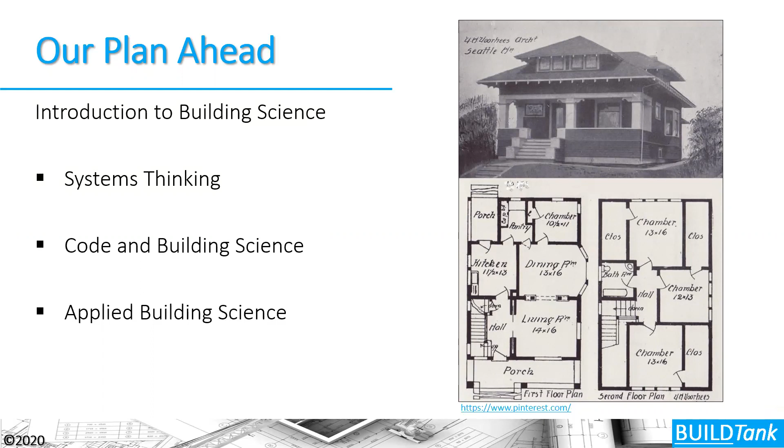To begin with, we want to have an idea of what our industry is about. This is a great quote from an organization called EEBA, the Energy and Environmental Building Alliance. They say residential construction is a complex operation, including thousands of processes by dozens of industries, bringing together hundreds of components and subsystems into a house. What we see from this quote is how complex our industry really is.

That complexity is tainted a little bit by the notion that we've been building or stick framing houses for quite some time. What has really changed is the number of people involved in the process. Back in the 1870s here in Nebraska, potentially a small family business or a group of farmers and people coming together in a community were taking a house literally from foundation through finished carpentry. Today, through research the National Home Builders Association has done, we see that upwards of 300 people are touching a house today.

And the big thing about those 300 people is that they've become specialized. Each person is doing a specific thing in the house, and very few of the people involved in the construction process really understand the totality of taking it from foundation through finished carpentry. We have an insulator, a framer, a plumber, an HVAC contractor, an electrician—all these different subsets coming in and doing their one particular component.

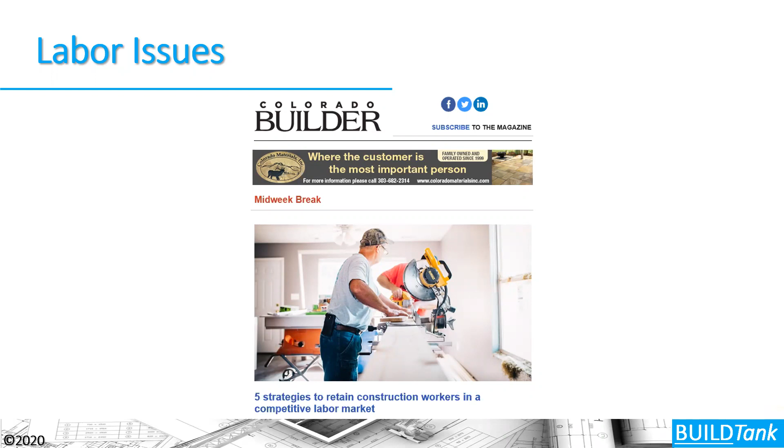We also have this relatively new issue facing our industry, and that's with regards to labor. That's one of the reasons why we're starting to specialize more. But we saw during the last recession that a number of folks left our industry, and a number of others are at retirement age. So we need to figure out how to bring people into our industry—people that are conscious and understanding this more holistic approach to building our houses, so that we move to houses that actually perform and work.

If we look at comfort, we can see that comfort expectations are fundamentally different from 1900 to our modern day. We've got a house in the 1900s where our grandparents might have lived, and they were probably willing to supplement what the house couldn't do—in essence, willing to put on a sweater in the wintertime, potentially shovel some coal or put some wood on a fire to get comfortable. In today's world, we're not willing to do that. We basically want to walk around in our underwear from room to room and floor to floor and be quote unquote comfortable. That fundamental change in expectations has changed the way we construct our houses.

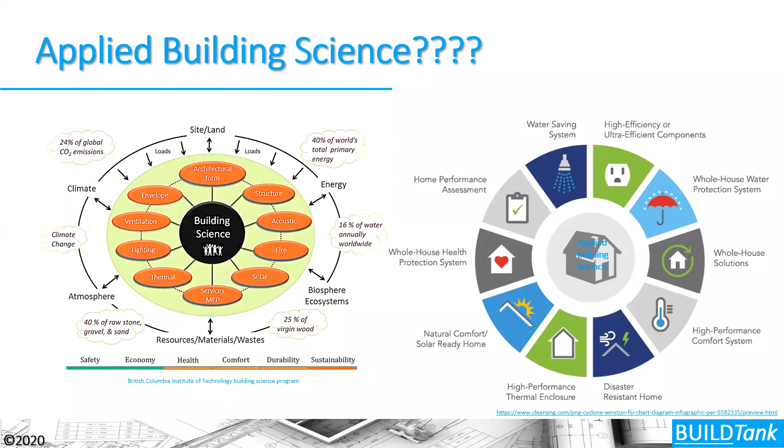Applied building science is really looking at a lot of different components and how we put these components into our houses, from water saving to energy efficiency to comfort, all these different things going together in our thermal envelopes, in our designs, in our expectations of our houses. If we break it down into its core, we're really talking about how do we understand airflow, heat flow, and moisture flow in our houses. These are the things we're trying to gain control and predictability of in a more holistic and scientific way, so that we can fundamentally meet the core expectations that people have of their homes.

So to begin with, this approach is revolving around a relatively new concept. In the last 20 or 30 years, this idea of systems thinking, or this holistic approach rather than a component approach of looking at how we're putting our houses together. Systems thinking revolves around this word synergy, which means that two or more things are coming together to achieve something greater than what could be achieved alone or by themselves.

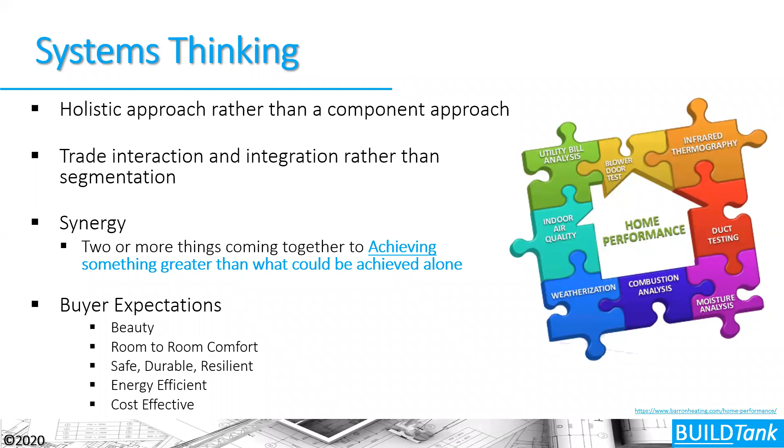What I like to say is that these core expectations we have of our housing really can't be achieved if we aren't taking a synergistic approach in how we build our houses. And that synergistic approach can be exemplified in a relatively simple example here. We have two components in our houses - we might put insulation and an air barrier system together, and we think we get one outcome of that: we're controlling heat flow in our houses.

But the reality is that these two things are coming together, and we're not only getting better control of heat flow, but we're also getting better control of airflow in our houses. We're getting better control of moisture flow, and we're also getting better indoor air quality inside of our houses. So these two things coming together are achieving way more than we might think about.

You think about putting a piece of duct and a fan together - those two things come together, well we're getting airflow, but we're getting moisture control, we're getting better indoor air quality again. So a lot of things that we put together synergistically work together to create the expectations that we have in our houses. And one of those expectations is long-term durability.

We want that house to last a long time. So really, when we're talking about control and predictability of heat flow, moisture flow, and airflow, we're really talking about durability and how long houses will last over time to meet those other core expectations that people have.

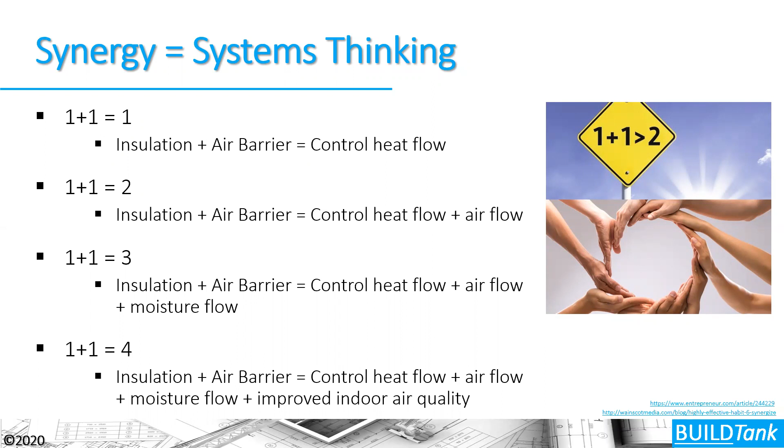From a building systems integration perspective, we need to figure out how we take the structure of our homes, the systems in our homes, and the enclosure of our homes, and how do we do that in a systematic building science applied manner? And how do we do that in a particular climate that we're living in, with whatever occupants are inside that house? All these things are coming together to create problems for us.

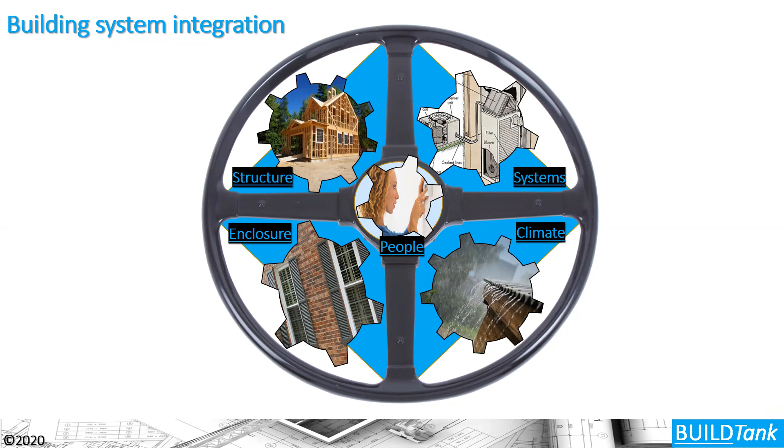The systems, structure, enclosure and climate - those are things we can wrap our hands around. But the people become the big wild card. They are the things that are going to turn our houses upside down. Those are the things we don't have control over.

We might be building a house for a retired couple, and the contract falls through, and a family of 5 comes and wants to buy that house. As a builder, I'm not going to say, I'm sorry, this house is designed for a retired couple, therefore you can't buy it. Obviously I'm going to try and sell that house, but that family of 5 is going to live in that house fundamentally differently than that retired couple.

And I need to be able to build a house that is going to be able to meet the expectations of whoever's living in that house, and understand what they care about, understand what their expectations are, understand potentially the strange things they're going to do to that house over time, so that we can take that into account and continue to build a house that will last over time, that will be comfortable, that will be energy efficient, that will meet the intent of the code and work for everybody.

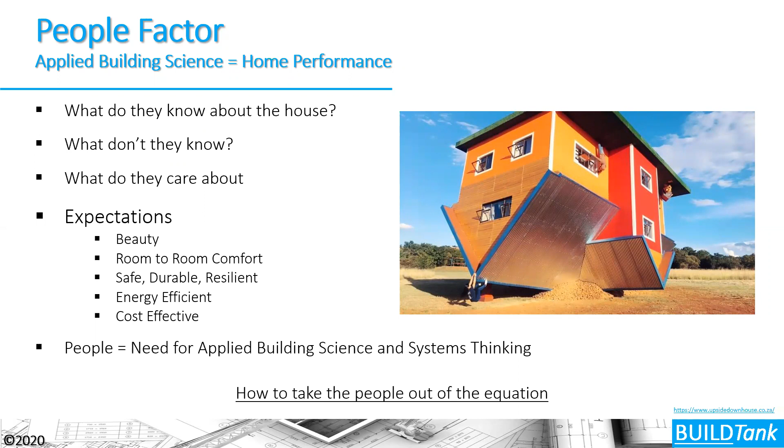So in essence, we're trying to figure out how do we take people out of the equation and build a house that lasts in whatever climate we're building that house in.

So we have kind of similar things that we're trying to do with our houses from a code perspective in climate zone 5, but we're going to tweak them slightly in our dry climates versus our moist climates, so that we have houses that will achieve that long-term durability we're trying to achieve.

So the macro climate is super important to understand. In Colorado, we've got probably the most climate zones of almost any other state. So if you're building here on the Front Range, you need to understand where you're going to place that house. If you're going up into the mountains, are you moving into climate zone 6, 7, or potentially 8? Or if you're going somewhere else, you might hit climate zone 4 as well. You're going to be asked to do something slightly different there, but it's all revolving around this notion of systems thinking and applied building science from that macro level.

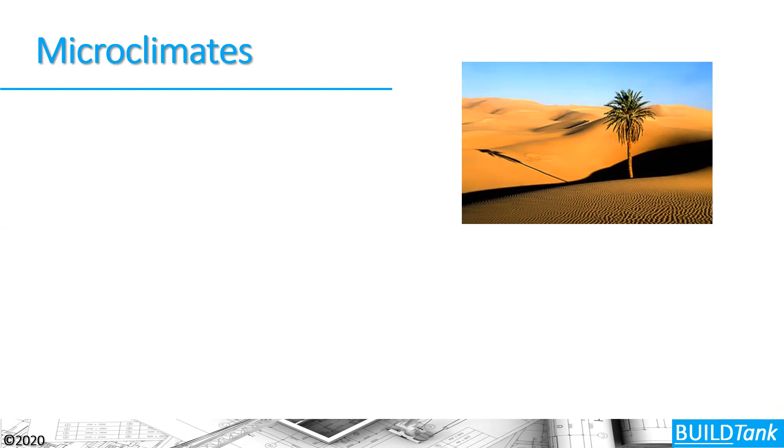But we also have micro climates that are inside our houses. Microclimates can be exemplified by this oasis that's in the middle of the desert. So in the middle of the desert, this palm tree is growing, and what's the factor that causes that palm tree to grow? Well, it's moisture. Moisture is the thing that really drives these microclimates inside of our houses.

So to get that control and predictability in our houses, we've tightened them up. We've added insulation systems and mechanical systems and ventilation systems, and we need to figure out the integration of these things, the synergy that comes from putting these things together to achieve our goal.

And our goal might just be, I don't want mold in my house. I want my house to last over time. If we have just that simple goal, well, tightening our houses, insulating our houses, mechanical systems, ventilation systems, and the integration of these things are what we need.

But we might have other goals. We might have to meet the 2018 IECC. We might have to meet an Energy Star program or a building program through the Department of Energy Zero Energy Ready Homes program. These other goals are goals that builders are trying to achieve all the time.

The big thing about these goals, however, is that we need to share these goals with all our trade partners. We need to make sure that our trade partners understand what the goal of the house is, what code they're being built to at a minimum, so that they can successfully build a house to meet the expectations that we have.

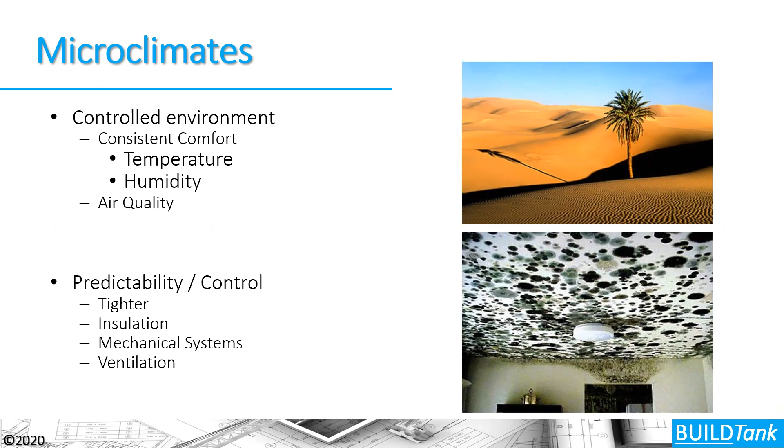Now, the IECC begins to think about building science and systems thinking when we start talking about the thermal envelope and the different control layers of the thermal envelope. But really, the IECC simplifies it more, I would say, by trying to clearly depict the thermal envelope on our drawings here.

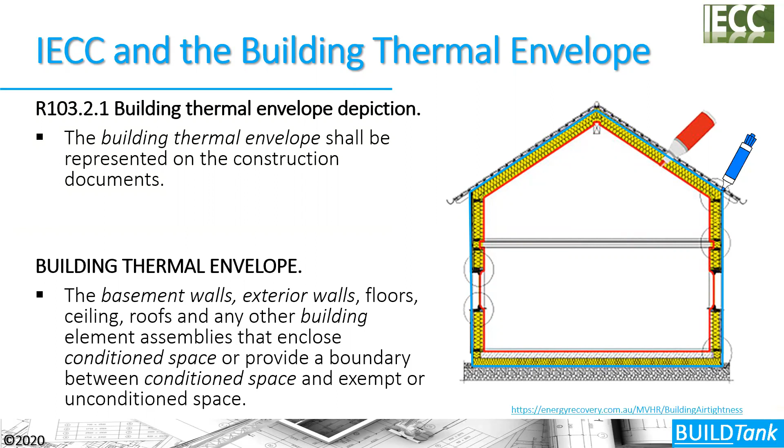Now, the building thermal envelope is defined in the code as basically an assembly of things. This assembly of things can be broken down into two primary components that create that building thermal envelope, and that would be our insulation systems and our air barrier systems, and the continuity of those air barrier and thermal barrier systems around our house to separate conditioned space from unconditioned space. That's what needs to be depicted on the building thermal envelope, because a lot of times it's not easy to decipher this out in the field.

We have this building thermal envelope in our houses, defining the separation between conditioned and unconditioned space. Sometimes it's awfully difficult to determine where that envelope is going to be, so the code helps us determine how to add supplemental air barrier systems into our homes so that we have continuity between the air barrier systems and the thermal barrier systems.

Sometimes it's pretty difficult to achieve that, and therefore we need help from people, either third parties or code inspection agencies that will come out. As a builder, you're going to say this is where I want my building envelope to be. An inspector can help you achieve that and figure out how to make that continuity happen.

So the code moves forward and talks about this continuity, that we need a continuous air barrier and thermal barrier all the way around our house. Again, it talks about these things as an assembly of different products that come together to achieve that air barrier system around our house.

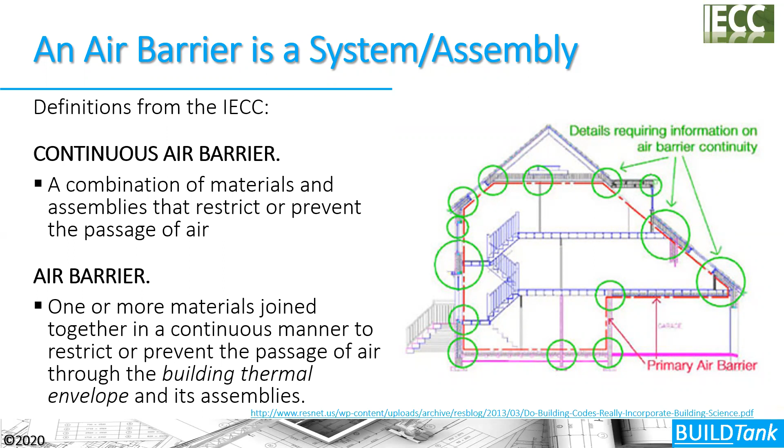In its simplest form, the air barrier system of our house can be thought about as the interior drywall and the continuity of the interior drywall. So you'll often see sections of the code where, if we don't have drywall in contact with the thermal insulation, the code will ask us to add a supplemental air barrier to the system.

For example, behind a tub on an exterior wall, that tub isn't necessarily the air barrier. We might have to add a piece of thermoply or OSB or something to get that air barrier connection between the interior of the house and the thermal barrier, the insulation of that house.

In the same way, on the exterior side, the exterior sheathing is our primary air barrier. So often in construction we think of one clear air barrier system in our houses, when the reality is that the whole assembly can, and often does, help create the continuity of that air barrier all the way around our house. That brings up the question of what's the house wrap?

I've always thought the house wrap was the air barrier of the system. Well, really the exterior sheathing is our primary air barrier. The house wrap might be a supplemental air barrier, but the house wrap's true reason for existence is to be this drainage plane.

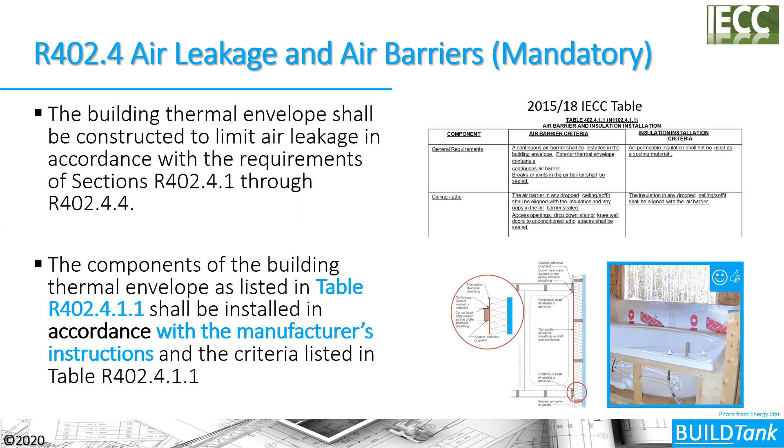What it ultimately gets us to, from an air barrier perspective, are these five key attributes: we need continuity, strength, durability, stiffness, and impermeability of the air barrier systems we're installing in our houses. So we have to understand that fibrous insulation is not an air barrier system—it's air permeable, it allows air to move through it.

So we need to pick things like thermoply, OSB, drywall, foam sheathing, these rigid air barrier systems to create the continuity around our houses, because those are the things that last over time and have the strength and continuity that can actually function in our houses.

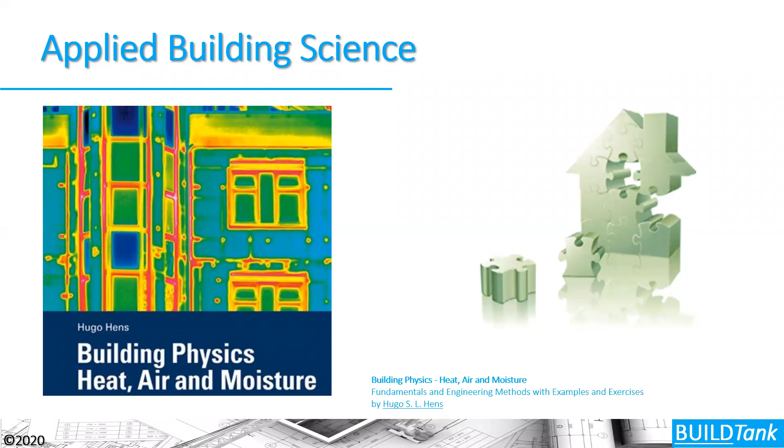So applied building science, again, in the code, let's break down thermal flow, moisture flow, and air flow. We're going to start with thermal flow in our houses and talk about the different components here.

Heat flow: heat always moves from higher concentrations to lower concentrations, or in essence from warm to cold, and never in the other direction unless you add additional energy to the equation. This is based on the laws of thermodynamics, which say energy can't be created or destroyed. Energy moves or changes forms, and there might be some waste there, but heat is this transfer mechanism between different components, always from higher concentrations to lower concentrations, though there might be some waste in that process.

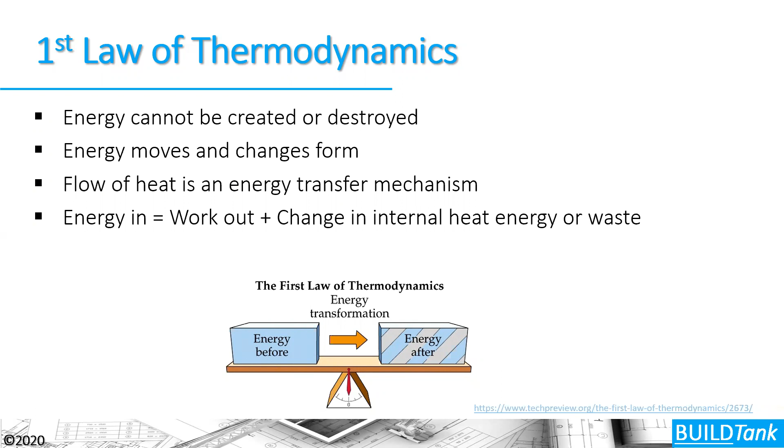We can see that if we look at a furnace, for example. If energy in equals energy out plus some waste, and I had 100,000 BTU at 90% efficient, then 90,000 BTUs would go into heating the house, and 10,000 BTUs would be waste going up the flue. That waste heat isn't beneficial to the house, but it's not destroyed heat. That energy is still out there, going into the atmosphere, into the weather patterns, for example. It's this notion that energy isn't created or destroyed, it just changes forms, and one of those forms might be a little wasteful.

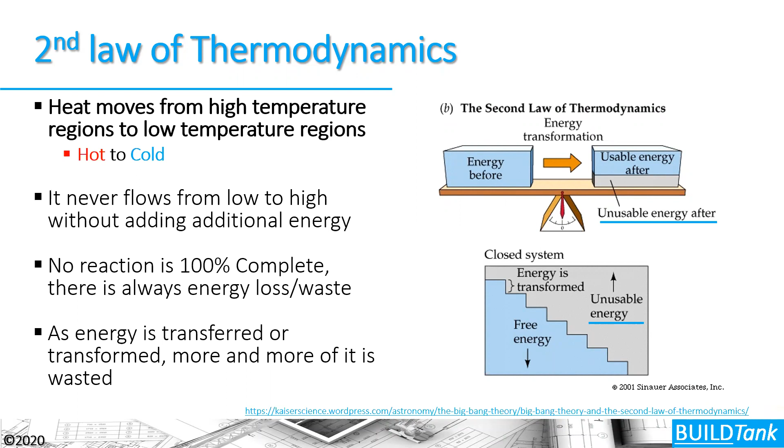So ultimately, from an energy efficiency perspective, we're trying to limit that waste as much as we can. The second law says that heat moves from high temperature regions to low temperature regions, in essence from hot to cold, or from higher concentrations to lower concentrations. It never flows in the other direction unless you add additional energy. And as we said, there is some waste, so there's no such thing right now as a 100% complete reaction. There is some energy loss, and energy is going through this transfer process from one object to another, or from one state to another.

So temperature is one of these things we need to understand. This is the heat, heat in the form of energy, heat as measured and how energy is transferred from one system or body to another. So if, for example, the heat in the body of this dog is moving from the body of the dog into the ice cube to actually cool that dog down, it's not in the other direction.

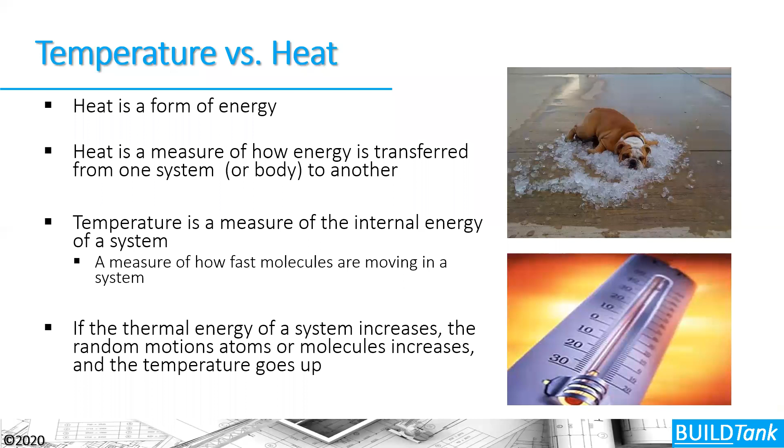Temperature is also a measurement of the internal energy of the system. This is the measurement of how fast molecules are moving inside that system. This gives us the ability to measure the heat in a thermometer. As those molecules move, the thermometer goes up. So there's this measurement quality in heat as well.

Heat is transferred in this exchange between physical objects. But things don't have to necessarily be hot to have energy, and this is how we understand a heat pump working. If we're trying to heat a house in the middle of winter using a heat pump, it's baffling to our mind that we can get energy out of super cold air, air that's below freezing, which is really amazing. It's all because of the physics that let us know there's still energy in cold air that can be moved into the house to actually heat that house. That's part of the energy transfer mechanism we were talking about.

This makes us need to understand the notion of delta T, or the temperature difference between different locations. So if I have a 68-degree interior temperature inside the house and 10 degrees outside, I have a delta T, or temperature difference across my building thermal envelope, of 58 degrees. That's going to help me understand the direction of heat flow from inside my house to outside my house.

Generally this is happening in Colorado in the wintertime, and in the summertime it switches so that we have more heat outside than inside, and the energy is trying to move from outside to inside our houses. Therefore, we're trying to create mechanical systems that can supplement the heat loss or heat gain that we might be having in our assemblies.

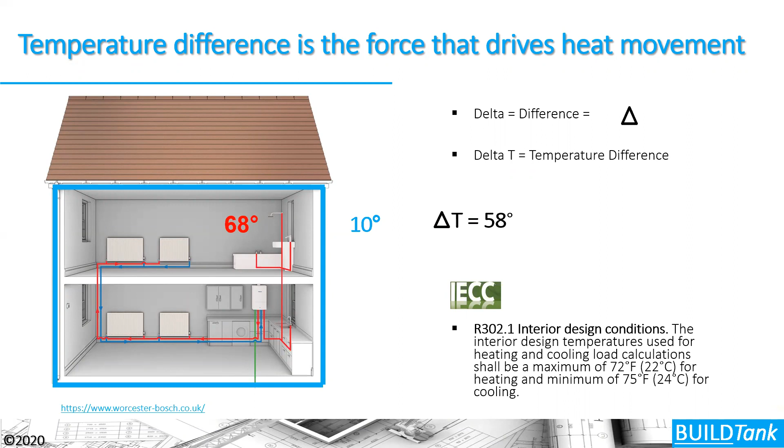So just to summarize again a little bit, the flow of energy is from hot to cold, or from higher concentrations to lower concentrations. And the higher the delta T, the greater the heat and air, or the more the heat and air want to escape or enter into our buildings. So delta T, again, is a good concept to have an understanding of from this heat flow perspective.

The last two things we're going to talk about are two types of heat and some energy principles here, because you need to have a concept of sensible heat. Sensible heat is heat that's able to be sensed by that thermometer, heat that's able to be absorbed or released by a substance. This is the energy that's ultimately described by heat load calculation, the energy that's going in and out of our buildings.

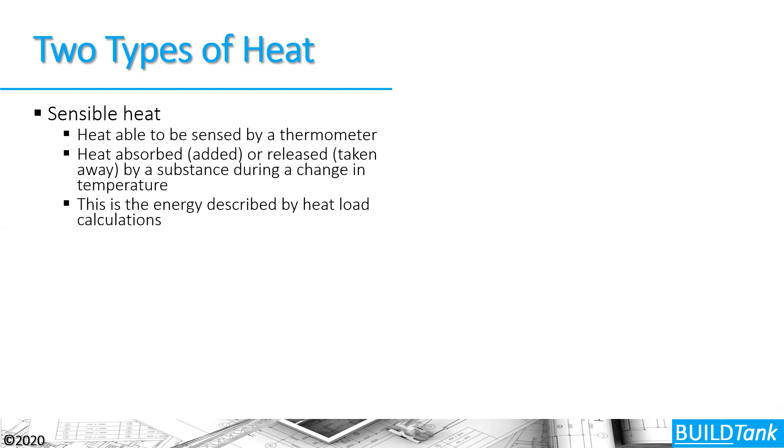The next one is latent energy, and this is the energy that's released or absorbed by a substance during its change in phase. So if we're going from a solid ice cube to liquid water, or to vapor water in its vapor state, energy is being released at each of those times, or being absorbed depending on the direction it's going. So latent heat is kind of a swing factor in our design process, especially when we're talking about HVAC systems and designing HVAC systems.

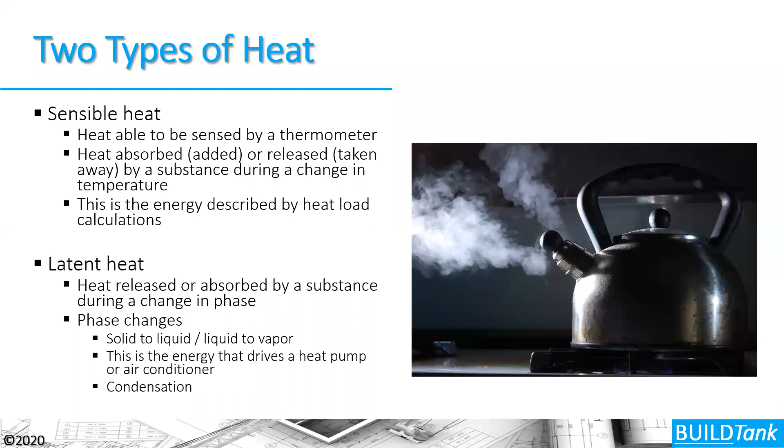And in Colorado, we don't have a large latent heat load in our houses, so we're primarily concentrating on the sensible heat. But you're probably going to come across a notion of latent heat when you're talking to an HVAC contractor, and it's good to have a background and understanding of what they're talking about there.

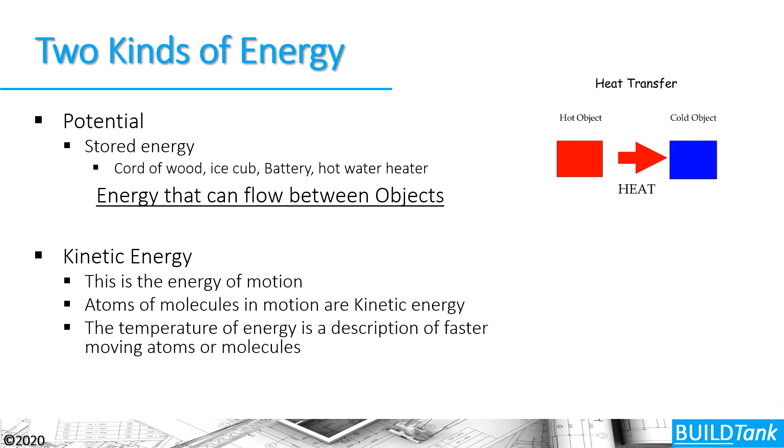And then the last thing, the two kinds of energy: we have potential energy, which is stored energy in a cord of wood or an ice cube, energy that can flow between objects, from higher concentrations to lower concentrations. And then kinetic energy, this is the energy of motion of atoms or molecules, and that's what we're talking about when we're talking about temperature and thermometers out there. Energy that's measured in that thermometer would be kinetic energy.

Okay, so that's heat flow, and heat flows through our objects or our homes in three specific ways: by conduction, convection, and radiant energy movement. Let's break these down in a little bit more particular fashion so that we understand them individually, because the reality is that they're working simultaneously in our houses. If we can understand them individually, we might be able to see if one is a bigger driver than the other. This is particularly helpful when we're talking about existing homes, if we're trying to diagnose a comfort issue in an existing home, or if we have a warranty issue in a new home potentially as well.

And we have certain members of our buildings that transfer heat faster than other members. In essence, our studs, our framing, are the weak point in our houses because the R value, or the resistance to heat flow, is only about 1 per inch for wood, versus a stud cavity that's blown with fiberglass insulation, for example, which might have an R23. So you're going to have more flow of energy through your framing than through your cavities.

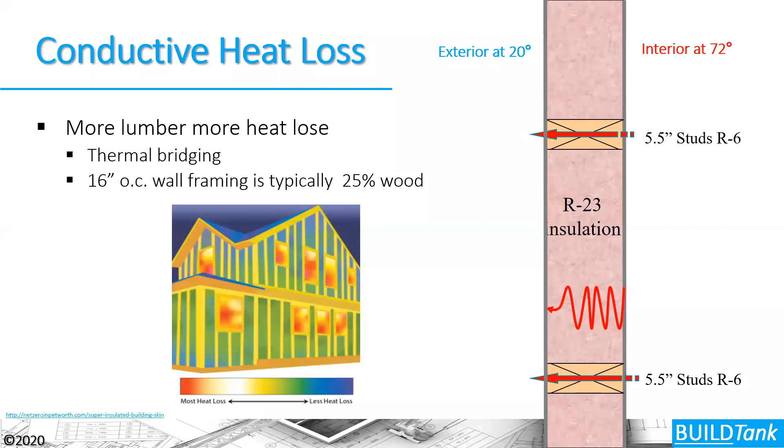Our typical 16-inch on-center wall framing is about 25% wood, so it might lead us to consider reducing the wood and going to 24-inch on-center framing, for example, in order to reduce the conductive heat flow and make our house a little bit more efficient. There are other components that are super important to think about from this thermal bridging perspective, where energy can move through our assemblies quickly.

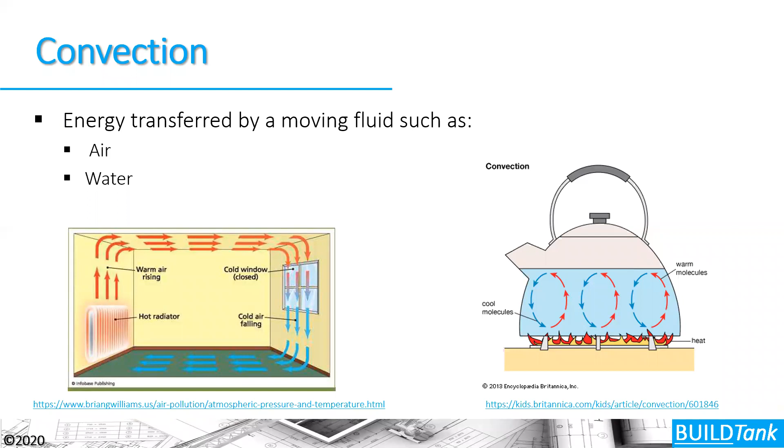Now, the next way that energy moves in our houses is by convection. This is energy that's moving with a fluid like air or water inside our houses. We can get convective air loops happening inside poorly insulated wall cavities or floor cavities potentially, generally wall cavities more because they're taller.

As air warms, it moves, warming on the interior side of our assembly. It rises, hits the top plate, and moves itself over to the exterior where it cools. That's where we start getting this loop effect, where energy is taken from inside our houses and moved to the outside, in essence bypassing the insulation. So the R value of the insulation, because it's not fully filling the cavity from side to side, top to bottom, and front to back, we're allowing convection to happen inside that cavity instead of trapping pockets of air there. So convection happens inside our wall cavities potentially, but also inside our rooms.

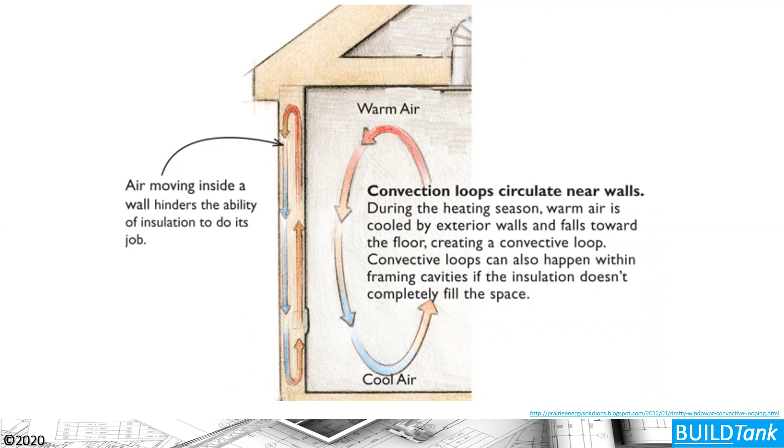So air can be cooling against the window, for example, and fall to the floor. Then as it moves into the interior side of our rooms, it starts warming and rising up to the ceiling and back, creating this loop again inside our houses. So properly insulated and sealed assemblies help us avoid this convective loop that might be happening inside our houses.

Which brings us to an idea of how do we insulate these assemblies properly. Here's an example of a test thermal box being demonstrated here. Now we have 4 cavities in this thermal box, and the idea is to pick which one we think is performing best and what is the R value of the one performing best.

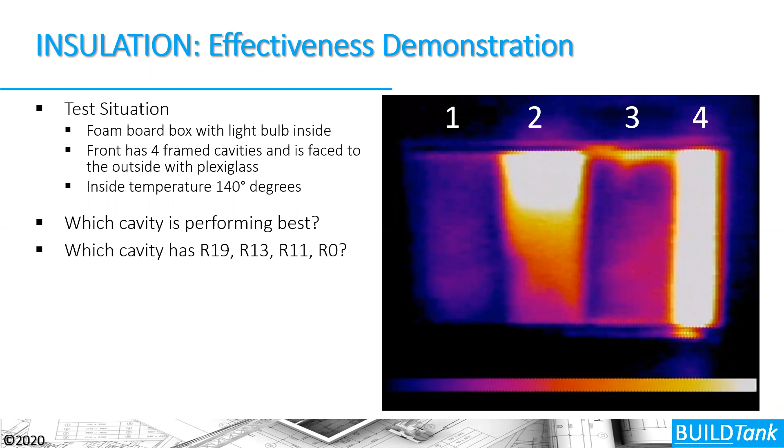So we have different cavities here, R19 to 0. I want you to think right now, which cavity do you think has the R19 batt and which cavity do you think is not insulated? I think you might be surprised, because the R11 batt is in cavity 1, and it has a proper air barrier system. The cavity's been insulated properly, and you can see it's performing the best here. There's less heat flow moving through that cavity.

Cavity 2 has the R19 batt in it, but there's a pretty substantial gap at the top plate, and it's not working. The 3rd cavity is an R13, installed pretty well but not perfectly. And the 4th cavity has no insulation in it at all.

So what we learned from this is that the R value is definitely important, but really how that R value is installed is even more important. So to get that reduction in convection and conduction happening through that assembly, we need to look not only at whether the insulation is in the cavity, but how it's been installed to actually perform and work properly.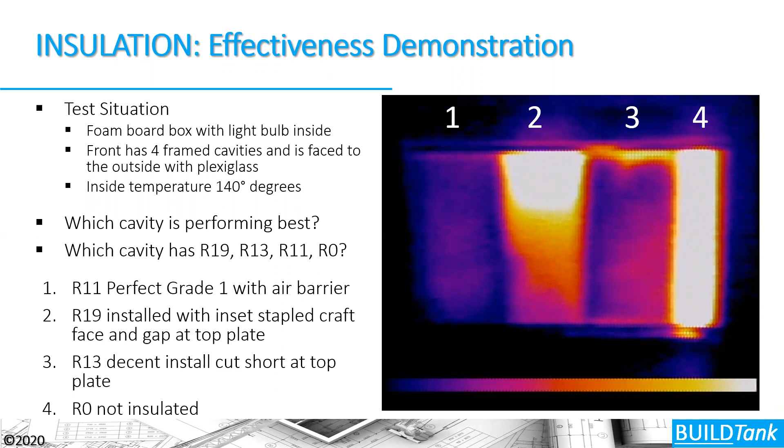And that's really what the code is helping us understand. Over time, especially with help from the city of Fort Collins, we've learned that this notion of 'is it there and does it work' needs to be the focal point of how we inspect homes to demonstrate compliance with the energy codes as they're being instituted now in our jurisdictions.

Radiant energy is the last way that energy moves in our houses. This is energy that's flying through open spaces from objects of higher temperature to lower temperatures. The best example is the energy from the sun moving literally through space to the earth, or a campfire. You've got the energy from that campfire moving linearly to you, meaning it moves in a straight line from that campfire.

It hits you and warms you up on your front side, but your backside is cold because the energy isn't able to wrap around your body. It moves in a straight line. The big thing to know about radiant energy is that you have to have an air gap.

That air gap can be on one side of the assembly or the other side of the assembly, but you have to have an air gap in order for that radiant air barrier or radiant energy barrier to actually work. We don't use a lot of radiant barriers here in Colorado since it's generally a heating dominated climate, but radiant barriers work based on this notion of emissivity - a measurement of how much radiant energy a material is able to emit into the assembly and retard the movement of energy into our buildings.

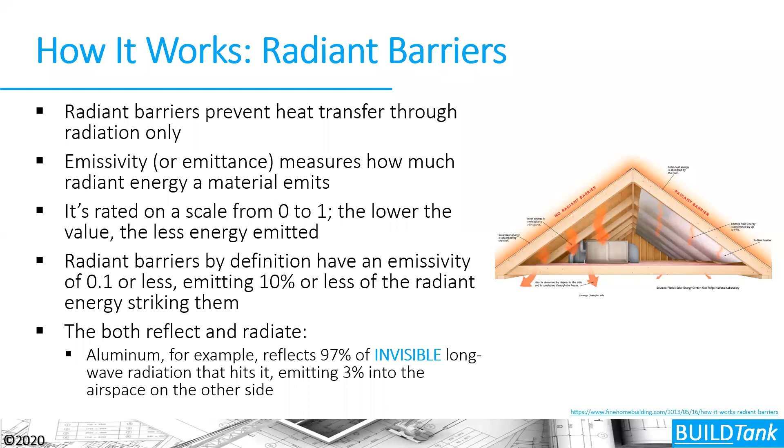If you move to a more cooling dominant or a cooling dominated climate, you'll need to know a little bit more about radiant barriers, and there's lots of information out there.

From a human comfort perspective, we're talking about mean radiant temperature here - this ability of our surroundings to impact our comfort because our body heat can actually radiate from our body to colder surfaces around us or from warm surfaces around us to our body. So it's either moving away from our body or to our body, to keep us comfortable or to make us uncomfortable.

I don't know if you've heard, but sometimes if you're in a kitchen with a lot of granite countertop and that granite is cold, you can actually be cold while you're cooking your meal because your body heat is radiating to that colder surface of the granite or to the colder surface of a window, for example. A lot of times when we have cold windows, people think that the window is leaky. The reality is that window is a cold surface and our body temperature is moving to that window, making us cold and also making air drop down and flow across that window from the height of the window down to the bottom, creating a current there. It doesn't necessarily mean that current is connected to the outside - it's just this radiant energy that's happening there, or potentially the convection that's happening there.

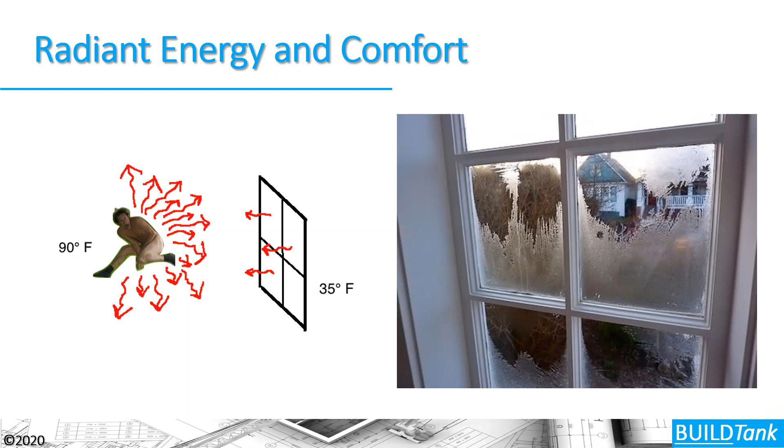So the six variables of human comfort are things that we might or might not be able to control, from air temperature, relative humidity, air movement, and mean radiant temperature, to things that we definitely can control, which are the clothes that we wear. We might not be able to control our metabolic rate, but we do have some ability to raise surface temperatures, to impact the relative humidity inside our houses, to limit the air movement, and again to raise the surface temperature around us to better control comfort inside our houses, so that people don't necessarily need to supplement their comfort by putting on a sweater in the wintertime, as we had to do in the early 1900s in those houses we showed before.

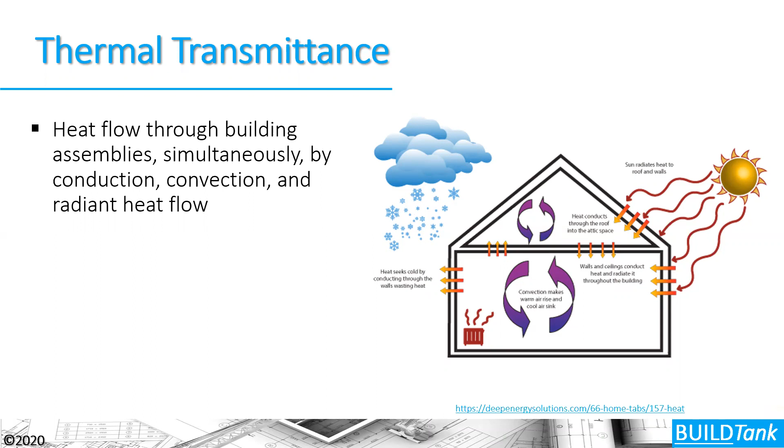Thermal transmittance is when all of these things are happening simultaneously inside of our houses. So again, it's important to remember that conduction, convection, and radiant heat flow are happening simultaneously in our houses, but we can often figure out which is the largest trigger and concentrate on that. Really the synergy of how we gain control and predictability of thermal flow in our houses comes from looking at conduction, convection, and radiant energy all at the same time.

Air sealing and insulation in the IECC relies primarily on manufacturer instructions. There are some specific instructions in the prescriptive section that are actually mandatory for how you install insulation in floor assemblies, cavity or other wall assemblies, ceilings, or attics. And then we have the insulation and air barrier table as well. But again, the code relies largely on manufacturer instructions.

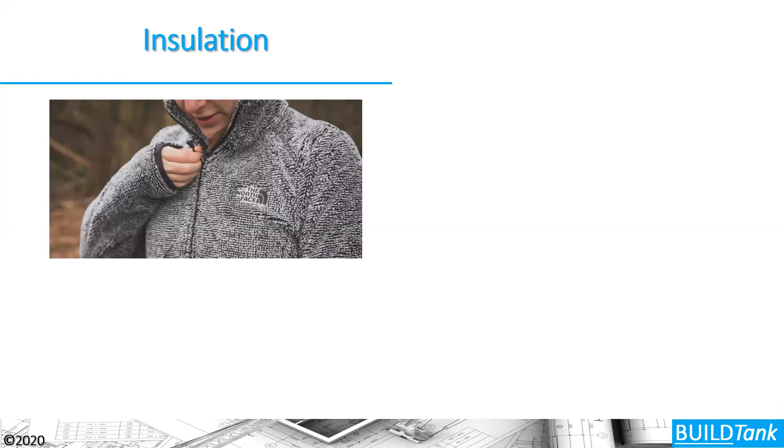So we need to understand how insulation works, and the reality is that insulation works exactly the same way that insulation works for our body. This guy is wearing a fleece jacket, and the object of this fleece jacket is that it will trap a pocket of air. It's really that stagnant pocket of air that creates the R value, or the resistance to flow of energy from higher concentrations to lower concentrations. So this energy is moving from this person's body to the ambient air outside of their thermal layer of insulation, which is this fleece jacket here.

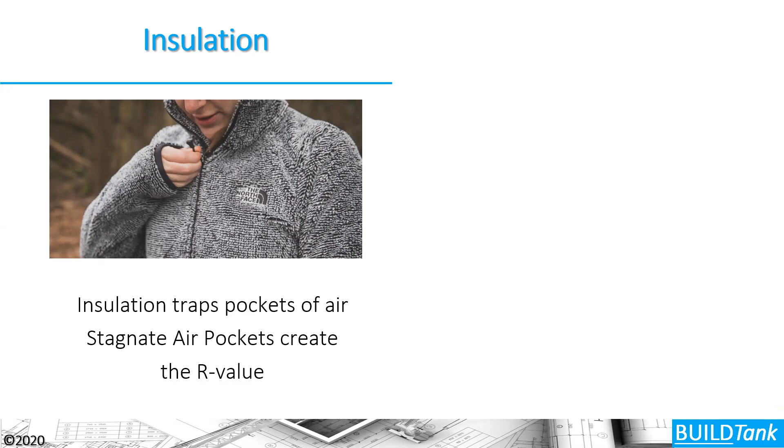The problem is that stagnant pocket of air won't remain stagnant if the wind starts blowing. If the wind starts blowing, then the air pocket is leaving the insulation, and with it, the energy is leaving too, and this person will become cold. So they need to put an air barrier over their thermal barrier.

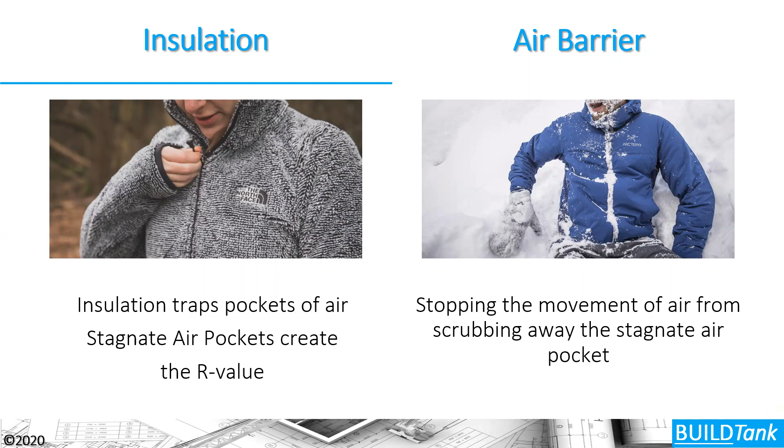So we get a nylon shell over our thermal barrier here, and we have a system that ultimately works to trap a pocket of air and create an assembly that works. They've got an exterior air barrier, which is their nylon shell. They have their thermal barrier, which in this case would be fleece. And then they have an interior air barrier system, which would be their skin. They have a system that works exactly the same way that it works for our assembly.

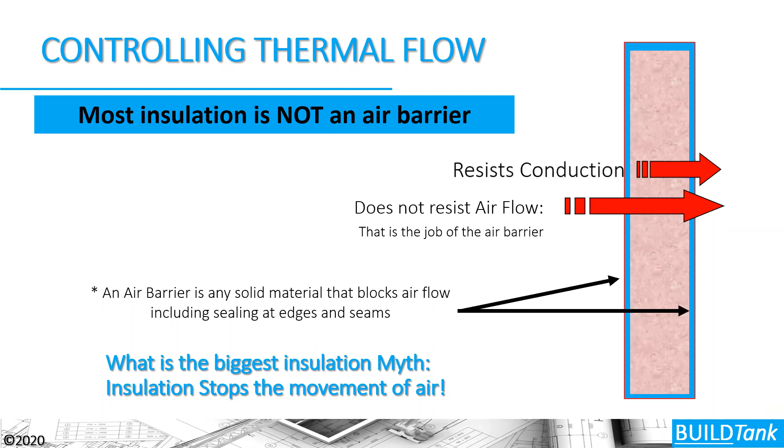We've got a thermal barrier here that resists conduction, but it doesn't necessarily resist airflow through that material. So we enclose our assembly on 6 sides with an air barrier system when we're talking about wall cavities and floor cavities in order to keep that stagnant pocket of air stagnant and get the rated R value of the material that's been installed. Because the reality is insulation doesn't stop air movement. So we need to understand that, so we can better look at the assemblies we're building and try to better ensure they're enclosed on 6 sides with complete air barrier systems, especially when using fibrous insulation in our houses.

From an airflow perspective, we're going to change course and start talking about airflow, and we need to think about airflow in our houses. I like to think about airflow as a freight train. Air is a transport mechanism, just like this freight train is a transport mechanism. This freight train's moving coal from point A to point B. Air is moving heat, energy, and pollutants around our houses.

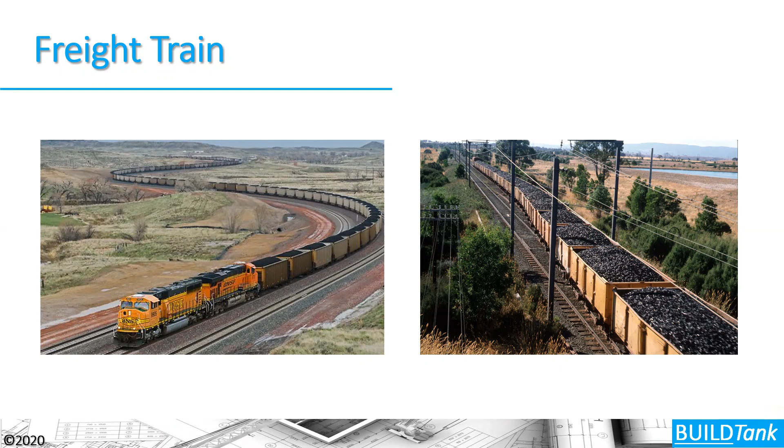And the problem is, when does the train drop its load? Where does it put its cargo? So where does the air put its cargo? If it's putting heat and moisture inside of our cavities, that's a problem. We're going to get repeated wetting and condensation most likely from that. So we need to be able to control airflow so we can control where it's depositing heat, moisture, and pollutants in our houses.

So you'll get this question quite often: can our houses be too tight? The real answer to the question is no, our houses can't be too tight, because in order to control airflow in our houses, we have to be able to build a house tight. We're actually asking the wrong question here. We need to control the airflow in our houses, and to control the airflow, we need to build our houses as tight as we possibly can.

But the real question is, are our houses underventilated? And the answer still, unfortunately, is yes, they are underventilated in most cases. We're getting better and better. It is now a code requirement that our houses not only be built tight, at a minimum to 3 air changes per hour in most jurisdictions that haven't amended the code, but we have to couple that with ventilated houses, whole house controlled mechanical ventilation as well.

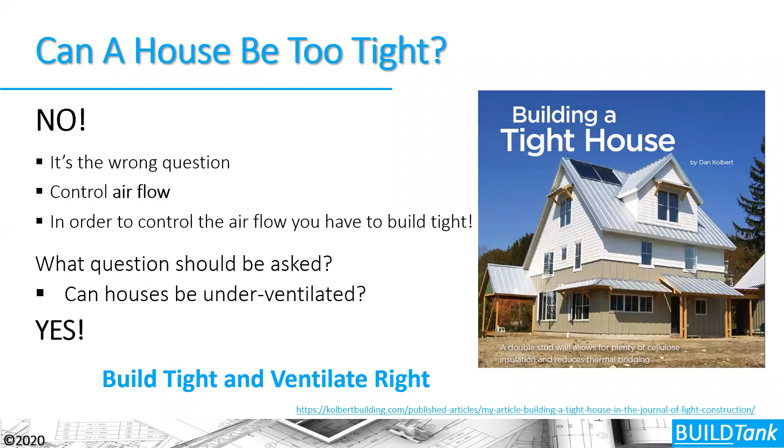So if we can have the synergy of a tight house and a well-ventilated house, then we can live up to this mantra of building tight and ventilating right. It gives us the ability to have control and predictability of airflow in our houses, and ultimately thermal flow and moisture flow as well.

So we're looking for that control and predictability in the same way that we might be going to McDonald's to get a Big Mac in Fort Collins or Windsor or Denver or Paris, France. Wherever I go and get that Big Mac, I know exactly what I'm going to get, exactly what it's going to taste like, and exactly how I'm going to feel afterwards. That's what we're ultimately looking for, is to get that level of control and predictability in our houses for airflow, moisture flow, and heat flow. Ultimately, when we get that control and predictability, we're trying to get this equilibrium inside of our house, this balance that creates a state of comfort.

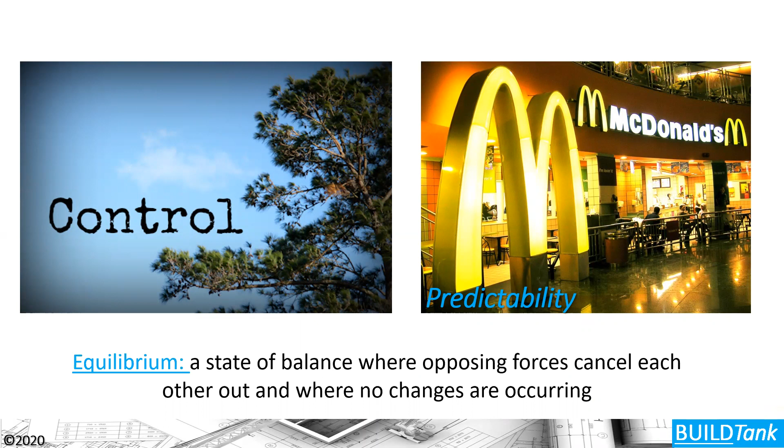So to get that control and predictability of airflow, we need to be able to figure out holes and pressures inside of our houses. We have lots of holes in our houses. We're getting better and better at sealing up these different holes and places. The code requires us to do some of this. For example, here at the rim joist, the code requires this level of air sealing. But the pressures are a little bit harder for us to do.

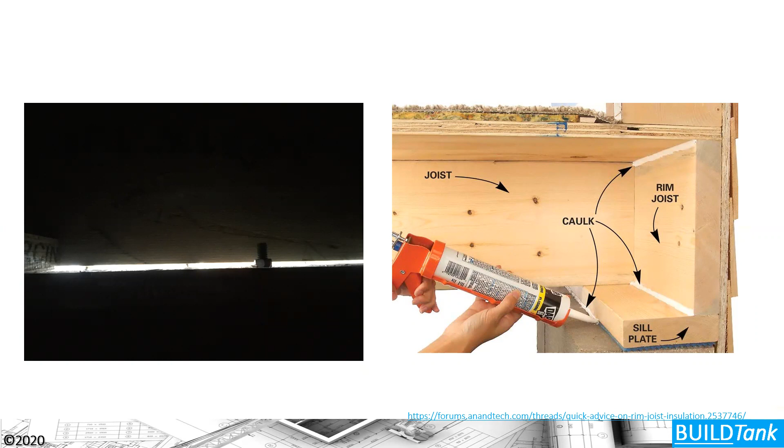So let's try to understand this in a little bit more depth. If I have a rubber balloon and the rubber membrane of that balloon is my building thermal envelope, the alignment of my thermal layer and my air barrier system inside my house, I have equal pressure on each side of that membrane. The pressure pushing out and the pressure pushing in are equal.

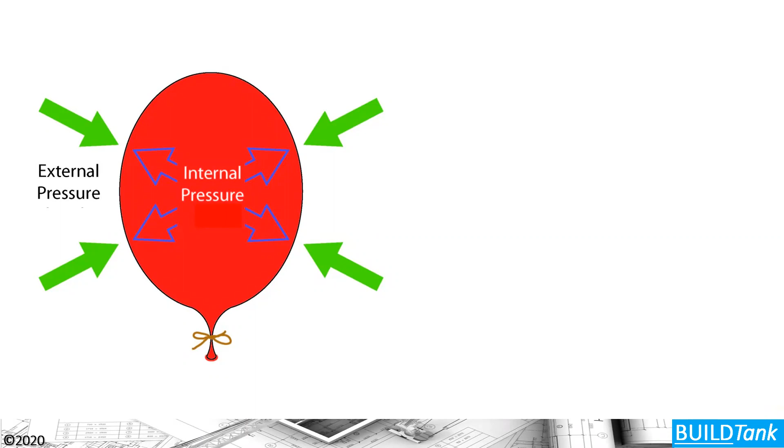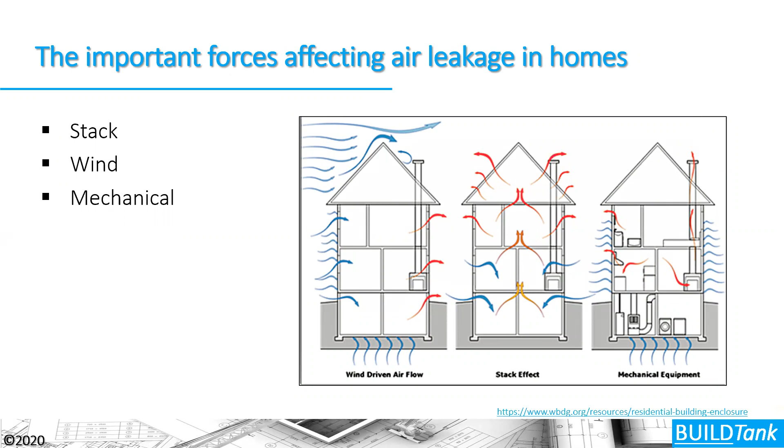But if I untie the string and create a hole, the pressures become unequal. I have greater pressure inside than outside, and I deflate that balloon. So in order for air to move inside our houses or around our houses, I need a pressure difference, and I need a hole that pressure can move through, that can push air through. It turns out we have some fairly constant pressures on our houses: stack, wind, and mechanical effect. But I need a hole as well for these pressures to interact and move air through our building assemblies.

Stack effect or stack pressure describes what happens to air as it warms. As air warms, it tends to rise and hits the higher planes of our houses. As it reaches those higher planes, it creates this positive pressure, and it's seeking a hole to the outside, maybe through a can light or plumbing stack or the connection between drywall and the top plate. Once air leaves on the high side, it has to be replaced on the low side. So with this notion of air in equals air out, the same volume of air leaving the house is replaced by the same volume of air coming in.

As our houses are taller, that stack effect can be increased. As the temperature difference between inside and outside is greater, that stack effect can accentuate as well. We're seeing these tall stacked townhouses being built, 3 or 4 story townhouses. It's pretty amazing, the stack effect you can feel when you go up to the top level, put your head over the railing of the stairway, and you can feel the air coming up through that stairway. That's the stack effect happening.

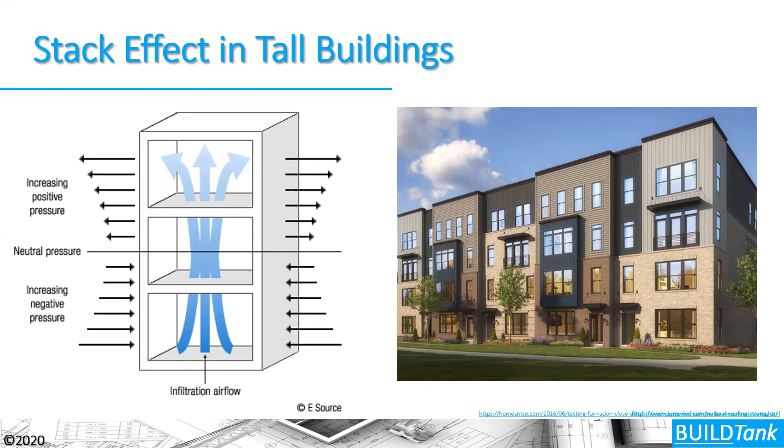The next is wind. And I know it's not that windy in northern Colorado, but just say the wind blows occasionally in northern Colorado. That was a joke, and unfortunately it doesn't work well when I can't see everybody and interact with everybody.

But anyway, air is blowing against our houses, and it creates a windward side and a leeward side of our houses. It creates pressures not only outside our houses, but inside as well. So as the wind blows, we get a positive pressure on the windward side and a negative pressure on the leeward side of our house. That creates a suction that is moving air from inside our house to outside. That can create a problem because that air potentially is moist and carrying heat. If it's carrying that moisture and heat through our assembly, we can have a problem inside our building assembly.

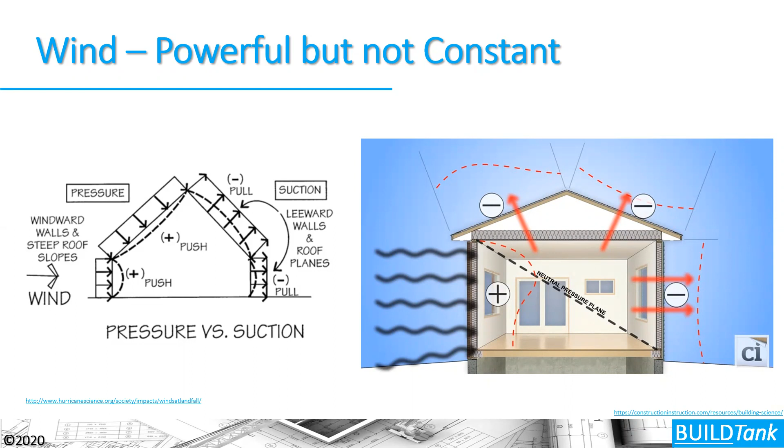Next, we have mechanical systems. Mechanical systems would be our HVAC systems or other fans that are moving air from inside our house to outside, creating unequal room pressures and house pressures. An example of that would be a duct system located in our attic that has a return side leak. The return side leak means I'm returning less air than I'm supplying to the house, and therefore, because I'm supplying more air to the interior, I'm blowing that house up like a balloon. I'm creating this positive pressure inside that house.

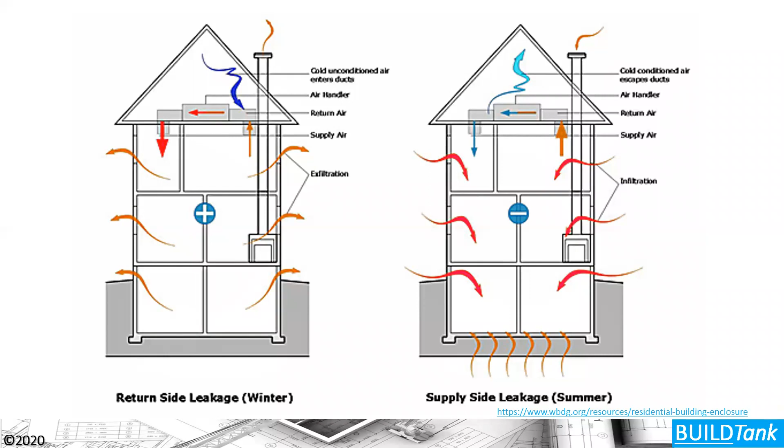The picture on the right shows the reverse, where I have a hole on the supply side of my duct system, and therefore I'm supplying less air than I'm returning, creating this negative pressure in the house, and sucking air from outside into my home. Neither of these examples are good for our home. We obviously want a balanced HVAC system so that we're not creating pressures that push air through our building envelope or suck air through it. Remember, air is a fluid, and it will move if there's a path present. So if there's a hole, that would be the path. And if there's a driving force, that would be the pressure. If those two things are present, then air will move through that building assembly.

If either are missing, air will not move. So we need this notion of air in equals air out. Now we're measuring this in CFM, cubic feet per minute, air in versus air out. To conceptualize that, a cubic foot is about the size of a basketball. So if air is moving out 1 cubic foot, that's like 1 basketball moving out of the house, which means 1 basketball is moving back in as well.

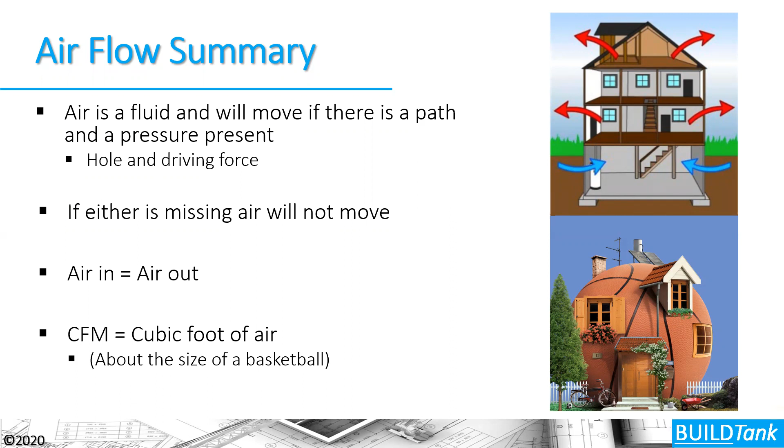So we have this 100-year-old house. The question is, how is it lasting so long? Well, the reality is that because it's drafty and uncomfortable, it's also very durable, because it ultimately has tremendous drying potential. If it gets wet, a lot of air is moving through that house and it's drying.

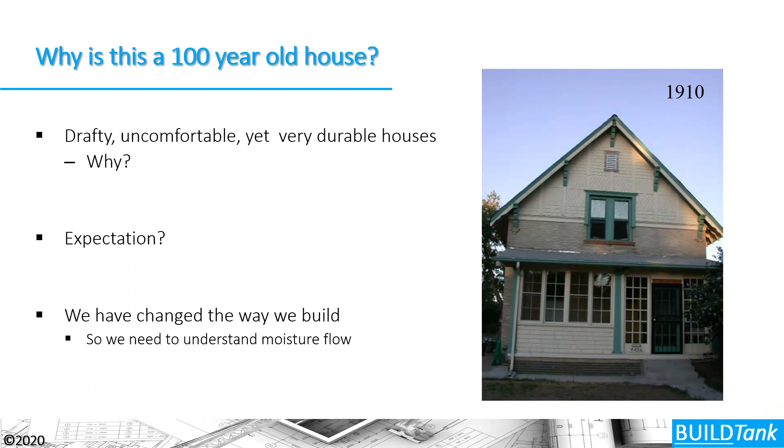But our expectations have changed the way we want to interact with our houses, and therefore I've changed the drying potential of this house. Because I've changed that drying potential, I need to understand how moisture is flowing through the house and how to promote drying mechanisms over wetting mechanisms. This is the last part of what we'll be talking about today.

So we know that things get wet, and therefore we need to let them dry. They get wet from the outside, from the inside, they get wet from the start — we often start with wet building materials. And then there's repeated wetting through condensation buildup in our houses, sprinklers against the side of our houses, and other things that repeatedly wet our homes.

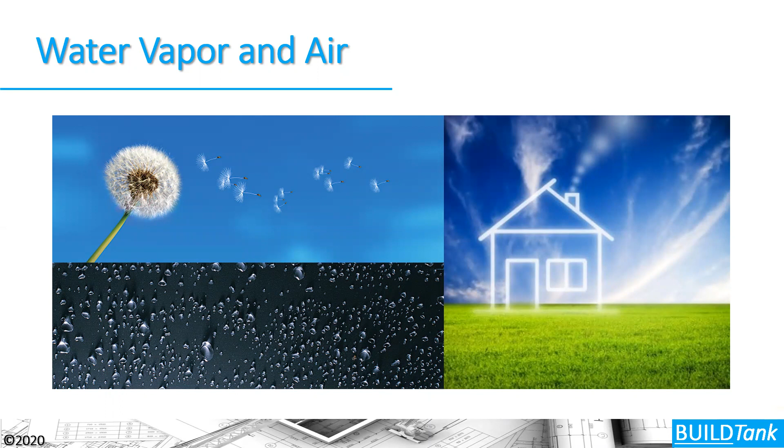Moisture flows through transport mechanisms. It can happen by gravity, draining down and out. It can happen by capillary action, diffusion, or vapor movement inside our houses, and then condensation as well. What we ultimately are trying to understand is that vapor, water in its vapor state, and air are basically one and the same thing inside our houses. So air is that transport mechanism — it's carrying moisture, energy, and other pollutants inside our houses.

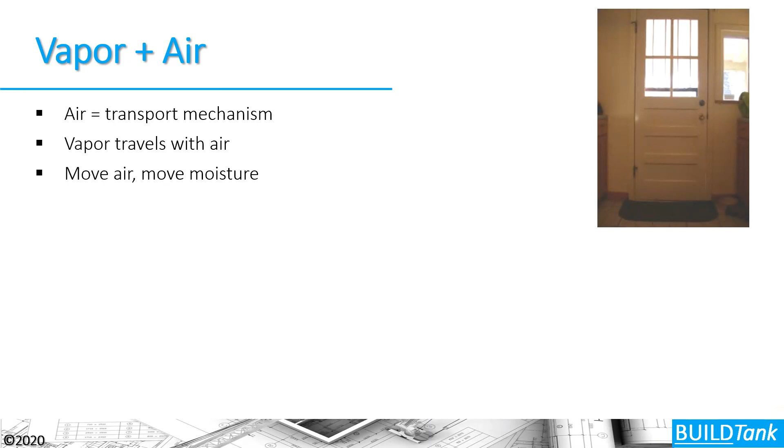This is an example of an unbalanced HVAC system. Whenever you turned on the HVAC system in this house, it pressurized the house and pushed air against this back door. Because this back door wasn't weather stripped well, air bypassed that door and hit the security screen door, and you see the condensation created on this door. This condensation can happen inside our building assemblies as well. We tend to have a 1-inch square hole every 6 to 8 feet around our house at our outlets, so if air is being pushed through that outlet into our building assembly, we can potentially get condensation there.

So just to summarize, we have holes and driving forces. If we can control the holes, we can limit the amount of moisture and air moving through them, because we need both the hole and the pressure in order for air to move through our building assemblies.

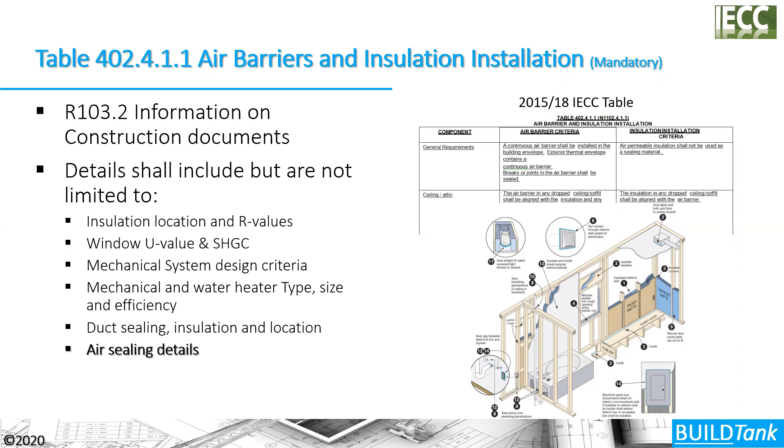Okay, so let's talk about this table. Again, this table is helping us gain better control and predictability of the holes around our houses, so that we have less airflow through those holes and therefore less moisture flow through those holes.

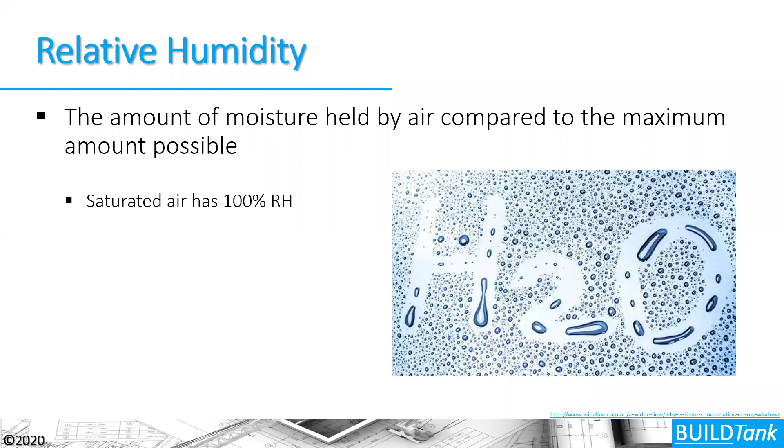Relative humidity is one of the things that is a measurement of the vapor content inside of our houses. This is the amount of moisture held by air compared to the maximum amount possible. When we have ultimate 100% saturation of air with moisture, then the moisture comes out of that air. So when we think about humidity, we need to think about the capacity of air to hold water vapor, and it's a function of temperature.

So think about that temperature as a towel. The more that towel can absorb water, the difference in relative humidity that we're going to get. Warm air can hold a lot more water, so we're going to have a bigger towel — a bath sheet when we're talking about warm air. When we're talking about cold air, it's like a face cloth or washcloth — its ability to hold water is substantially less than warm air.

Absolute humidity is how much moisture is in the air by weight, and relative humidity is the amount of water vapor present in air expressed as a percentage of that total amount of saturation that can happen.

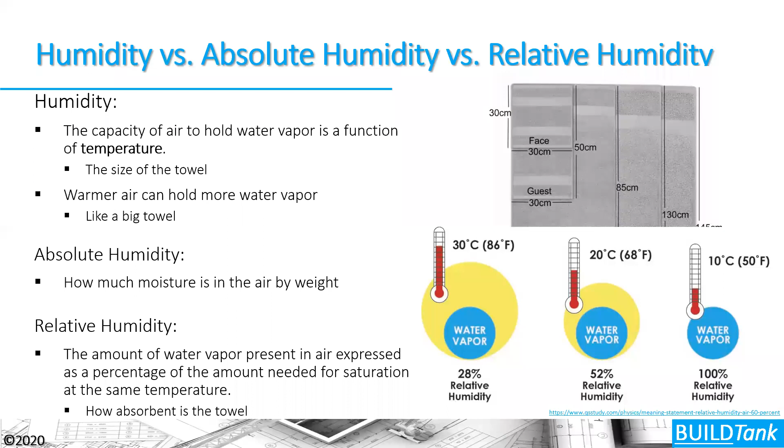So this is ultimately asking how absorbent is that towel there, in the towel analogy. Now, what's interesting that's happened most recently is that we're starting to understand relative humidity in a little bit different way in our houses, from an occupant health perspective.

From a building perspective, the drier the air, the better. But from an occupant perspective, we're starting to learn that there's this sweet zone between 40 and 60% relative humidity that might actually help us decrease infection, prevent allergies, and improve healing and hydration of our skin.

So there's this balance point that we need to reach, but what we ultimately know is that we can't go above 60% relative humidity in our houses, else we're going to potentially get mold growth. Ideally, we're going to be in that 40 to 50% relative humidity as a max, and from a house durability perspective, that 20 to 40% relative humidity is where we want to be.

But this whole COVID era that we're living in has brought up this new research that is kind of changing our thought process about relative humidity in our houses. We need to figure out how we're ultimately going to deal with that and continue to have houses that are durable over time, but also meet our occupants' health needs as well.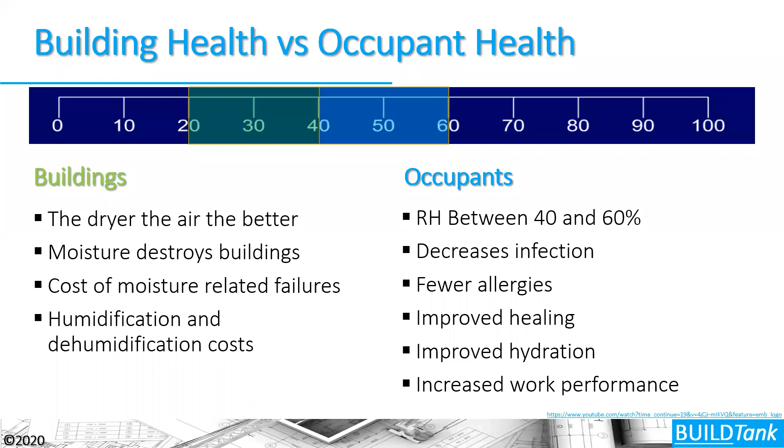From a moisture control perspective, we're trying to ensure that we're not getting mold growth in our houses. Mold is always there, but mold needs some things to help it grow. It needs that wood or that nutrient to be able to help it grow. But it can grow on all kinds of different things, from drywall to carpet fibers to upholstery to paints. It can grow on all those different surfaces. But it ultimately needs the spore itself, its nutrient, and its moisture content in order for it to grow properly.

If we can control mold growth, it means that we need to control moisture and keep it in that relative humidity range of 30 to 50%. We need to stop condensation or that repeated wetting that would help mold grow. And we need to have better air control and ventilation in our houses to control the spores, and ultimately promote drying mechanisms over wetting mechanisms.

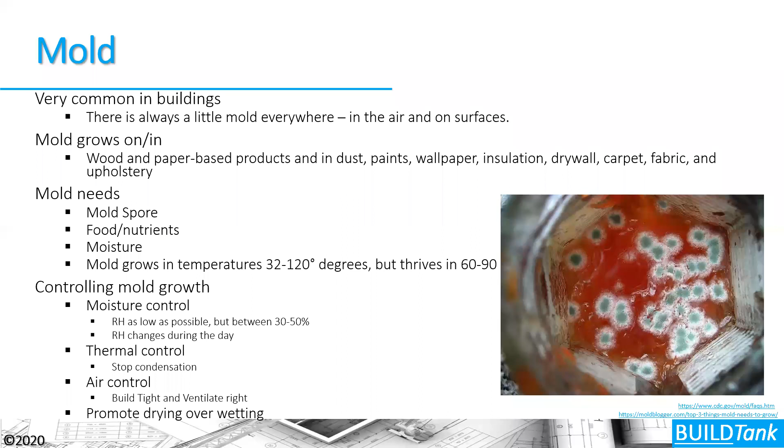So we have these different ways that moisture flows in our houses, from bulk water to condensation. Bulk water is ultimately thinking about how do we allow water to hit the surfaces of our houses, to drain down, and then ultimately away from our houses using gravity. That's our primary system beyond our roof assembly: these drainage planes, drainage screens that we install, a variety of different products out there to do that.

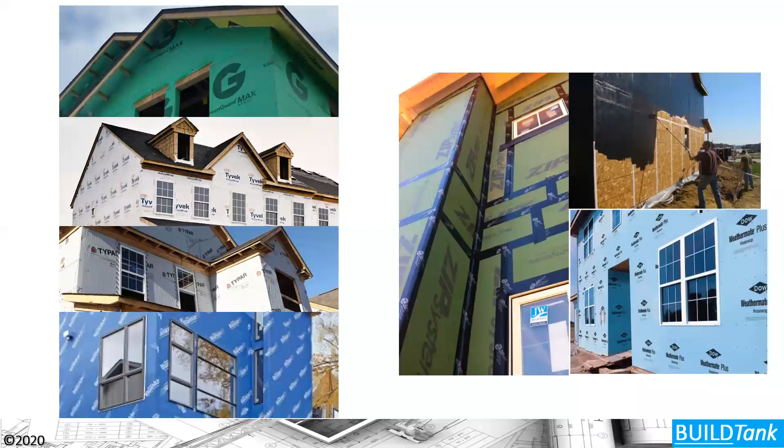But what we're learning really is that we not only need to put these features on our houses, but we need to also introduce a gap, a drainage gap, to promote that ability for the water to drain down and ultimately away from our houses. So this vented rain screen is what you're going to start hearing about more and more.

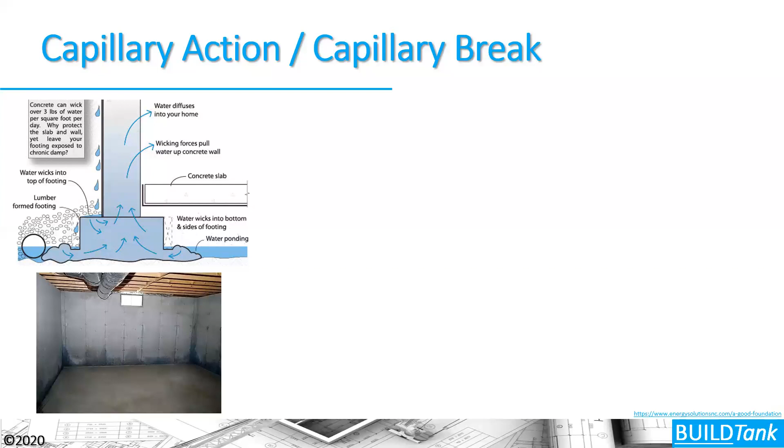Capillary action is when water is sucked upward through the pores of porous concrete, for example, in this situation. These tiny pores create this capillary suction that moves the water up and out. So capillary breaks are things that will stop that moisture from moving from one component to another.

So sill seal is actually a capillary break to keep moisture from moving from our concrete up into our wood assemblies. It does not work very well as an air sealing mechanism because the top of our foundations are not very level, and we tend to shim that sill plate a lot. So the code is actually asking us to air seal this connection as well as get the capillary break in there, but the primary focus is the capillary break.

And then if we're really looking at the applied building science, we're going to start thinking about how do we get capillary breaks between our stem wall and our footings, and between our slabs and the soil below our slabs, because that soil has a constant moisture content that's trying to wick up into our building assemblies. We want to obviously keep it out of the wood component.

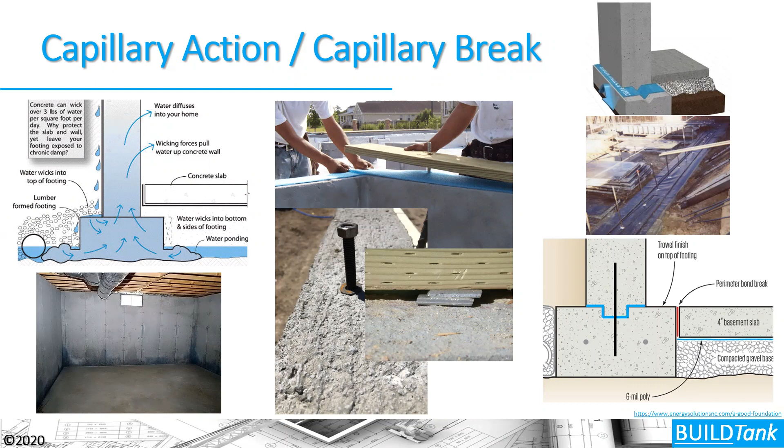Moisture diffusion is when moisture is moving from higher concentrations to lower concentrations, and it's moving directly through the pores of our assemblies.

The reality is that this moisture movement is a rather small moisture transport mechanism. In a study that's been done over and over again, we have a sheet of drywall, and over the course of a heating season with the conditions demonstrated on the slide, only 1/3 of a quart of water was able to diffuse through that sheet of drywall, whereas 30 quarts of water were able to move by air leakage through a 1-inch square hole in that assembly.

So it turns out that the code is really focusing heavily on diffusion and has just recently started focusing heavily on air leakage. But air leakage has been focused on from an energy perspective, not necessarily from a moisture transport mechanism. We still have some work to do from a building science perspective and the code to link moisture transport and air transport together.

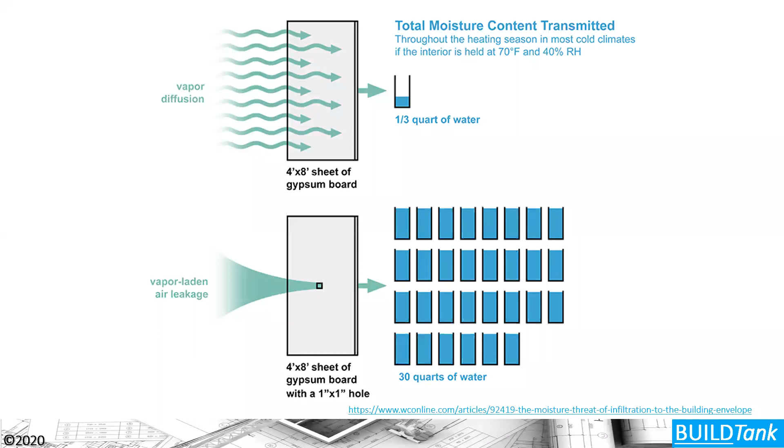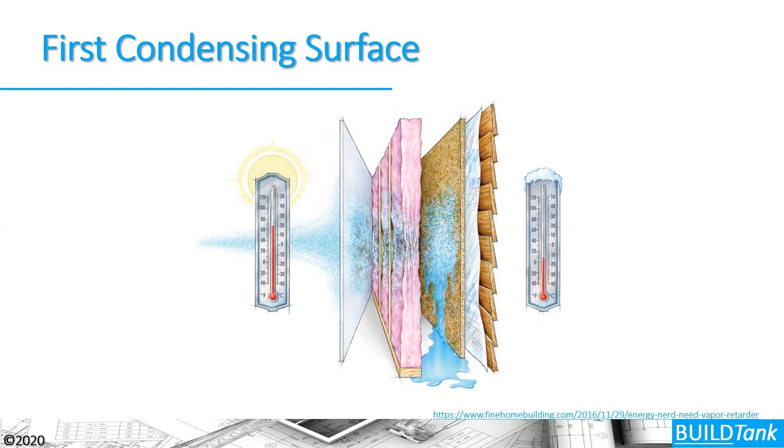Ultimately what we're trying to avoid is moisture buildup in our assemblies that creates condensation on that first condensing surface. This diagram shows moisture moving into the assembly by the process of diffusion. Remember that's a relatively small moisture transport mechanism. If I have a hole in that assembly, I'm going to get way more moisture through that hole than is able to diffuse through the assembly. But in either case, that moisture in the assembly has the potential to condense on the exterior sheathing if that sheathing is at a particular temperature.

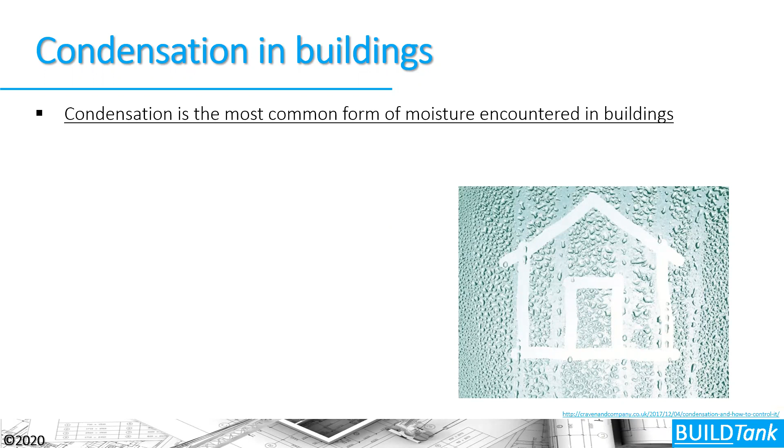That repeated wetting is condensation. It's the most common form of moisture encountered by buildings, and that's why the code is asking us to do insulated corners and insulated headers so that we warm those surfaces. In our climates, we have options in climate zone 5 of doing insulated sheathings to warm that surface temperature. As we move up into the mountains, it becomes almost a requirement to start putting foam sheathing on the outside to reduce condensation that might happen inside those assemblies.

Tight houses have higher levels of humidity just by themselves, so we need that background moisture control through ventilation. We also need source control through ventilation to ensure that what we're doing in our kitchens, bathrooms, and laundries, that moisture is taken up and out of our houses as soon as it's created.

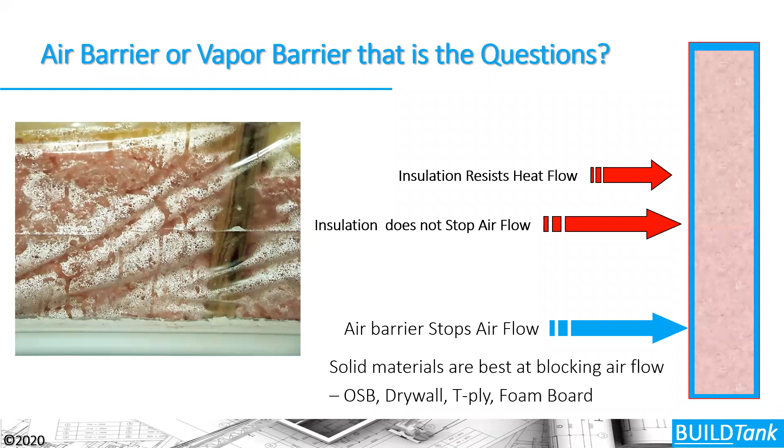Because we have this great assembly here, but if we allow moisture to get into that assembly, the way that the code is asking us to build that assembly right now by putting a vapor retarder in the assembly, that vapor retarder is likely to actually trap moisture in that assembly.

Because ultimately, we don't install the vapor retarders in Colorado very well. We don't overlap the seams. We don't put airtight boxes with flanges on them. We don't seal the vapor retarder to our top plates and our bottom plates and to our other openings. And we don't even put the vapor retarder continuously around our building envelope. When's the last time you've seen a vapor retarder at the rim joist, for example? It can be problems here.

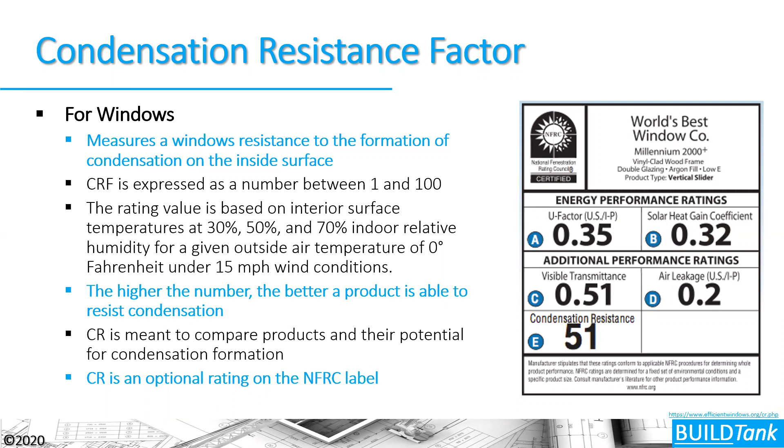Condensation resistance factor is an interesting new label, or new component, of the NFRC window label that's come out, and it's something we should be looking for. Basically, the warmer the window's surface temperature, the less condensation we're going to get on that window. So again, the continuity of our air barrier system keeps moisture out of the assembly.

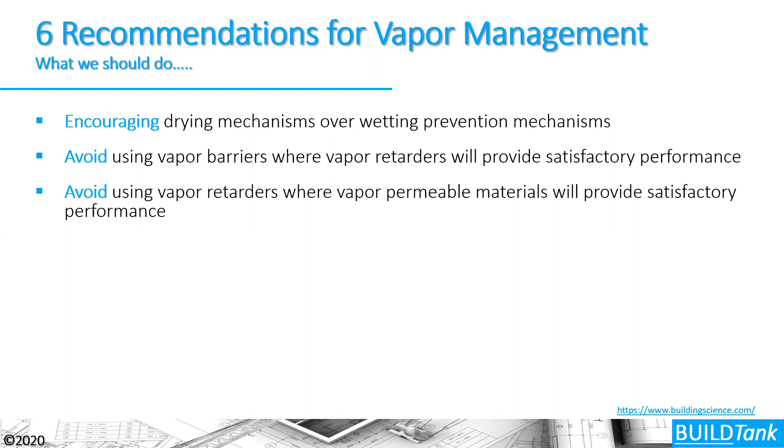Ultimately we want to ensure that we have drying mechanisms over wetting mechanisms, that we avoid vapor barriers when retarders will work. We avoid vapor retarders where vapor permeable materials will work in our assemblies, and we avoid the installation of vapor retarders or barriers on both sides of our assemblies. We don't install vinyl wall coverings. This is generally more often an issue for motels and hotels than housing, but it can cause problems. We have proper ventilation in our assemblies, and we make sure that ultimately we're allowed and continue to use class 3 vapor retarders over class 1 vapor retarders. There's some ability for our assemblies to have drying potential there.

To conclude, we need this understanding of building science, which revolves around the notion of systems thinking - the idea of synergy, two or more things coming together to achieve something they couldn't achieve before. Applied building science is being wrapped into the code more so we get control and predictability of heat flow, airflow, and moisture flow in our houses. This sound and well-defined building thermal envelope is key, so that we have insulation and air barrier systems all the way around our houses to help us gain that control and predictability.

We see that the IECC and the IRC and other building programs out there, like Energy Star and the DOE Zero Energy Ready Home program, are incorporating building science into their programs and codes. The better we understand that building science, the better we can integrate it into our building process if we start from the beginning, early in the design process of our homes.